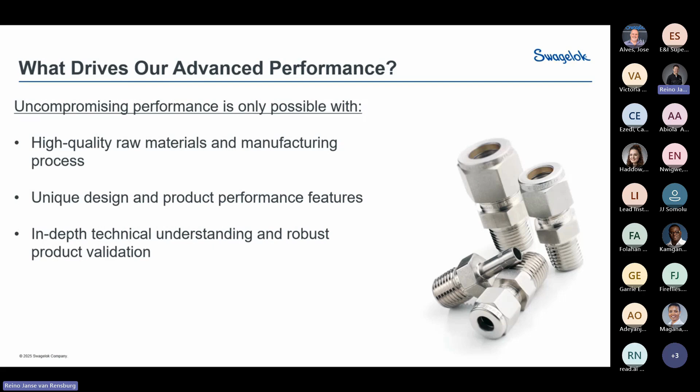Okay, so the three factors that we take into account when we talk about tube fittings: first off is tube grip, secondly is the gas seal, and then lastly is your vibration protection. So we'll look at them in that order, and I'll explain them as we go along.

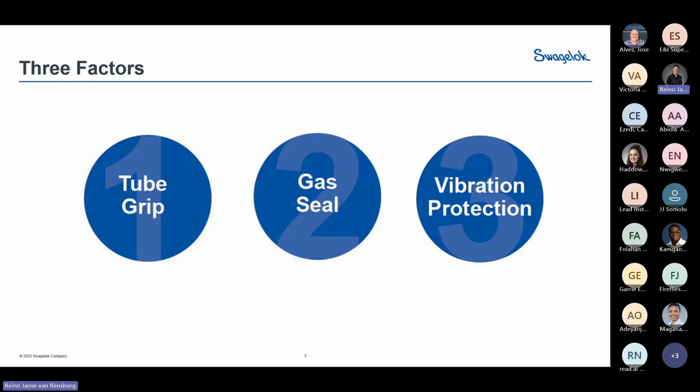Okay, so firstly, if we look at tube grip, with our tube fitting, our back ferrule does all of the tube gripping. So if you look at the picture on the right-hand side, you will see the blue ferrule on the left. So that's our back ferrule. It uses a hinging and colleting action, and that provides more direct tube contact and tube gripping support. So other than original or previous generations of tube fittings, where you basically make contact with your back ferrule by biting into the wall, this back ferrule now hinges in the center.

So if you guys can see my mouse, in the center of this back ferrule, you basically have a compression and a hinging action taking place, making our back ferrule grip onto the tube and holding onto it. So this gives us our tube grip as well as our vibration resistance. Because of our design, we have more material to work with. So this gives us direct axial support, and then also it's a colleting squeeze.

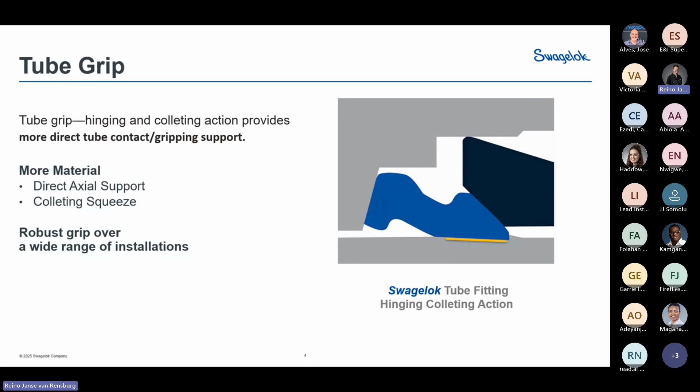So much more of the material actually grips and holds onto the tube than the traditional ferrules, where it was a bow and biting action, and your front ferrule would almost penetrate the side of your tube wall in some instances. Okay, so here you can see the tube grip basically contains the system fluid, and you want it without leakage at your maximum working pressure to maintain both the grip and the seal.

So here you can see with a single ferrule bite-type fitting, the picture on the left-hand side, the only contact you make with your tube is where that leading edge of your front ferrule basically bites into the side of your tube, and then where it makes contact with the inside of the fitting body, the top part over here where my mouse is. So one ferrule has to do the tube grip as well as the sealing.

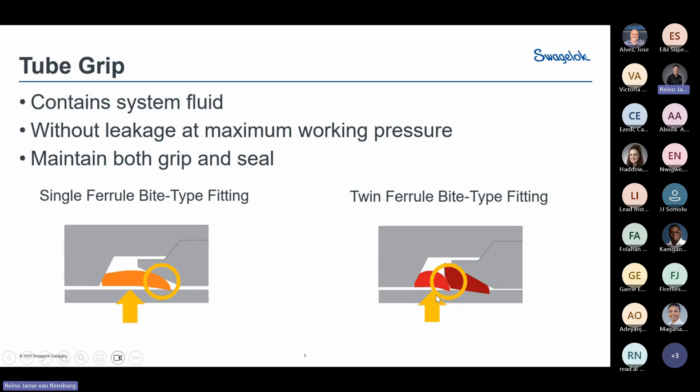Okay, if you look at the one on the right-hand side, this was a later design. This is basically where you have twin ferrules, but you still have your back ferrule penetrating the wall, and then you rely on your front ferrule biting into the tube as well, giving you the seal. So this is a little better, but you still have that high stress zone that gets applied to the side of your tube wall.

Okay, so if we look at our Swagelok tube fitting, like I mentioned to you earlier, we use the hinging colleting tube grip fitting. So we don't have that biting action into the tube wall, not with our front or back ferrule. So we don't put any additional stresses onto the tube or onto our fitting.

So all of the stresses get handled by our back ferrule, which basically hinges where that yellow arrow is pointing, and then ends up gripping the tube, pushing our front ferrule forward, which also grips onto the tube to form a seal onto your tube as well as seal into the inside of that fitting body.

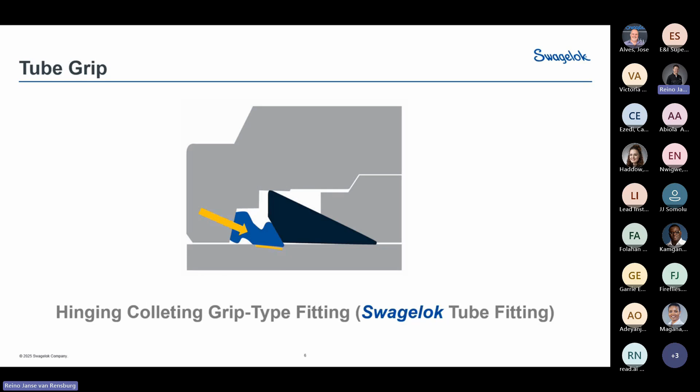Okay, so like I said, our gas seal takes place on the front ferrule. So what actually happens is when you tighten up your tube fitting, at the end of the presentation you will see a step-by-step guide on how to install a Swagelok tube fitting. But as you tighten up that tube fitting to the correct amount of turn, you actually have a burnishing or a polishing action of the front ferrule that creates a concentrated zone of contact on the tube and on the inside of that fitting bevel to give you a much stronger seal.

So that's why it's important that you have proper tube grip from your back ferrule to make sure it doesn't let go and your front ferrule doesn't let go of the tube. If you look at those yellow lines, that's where it forms your gas seal to make sure you don't have any system leakage.

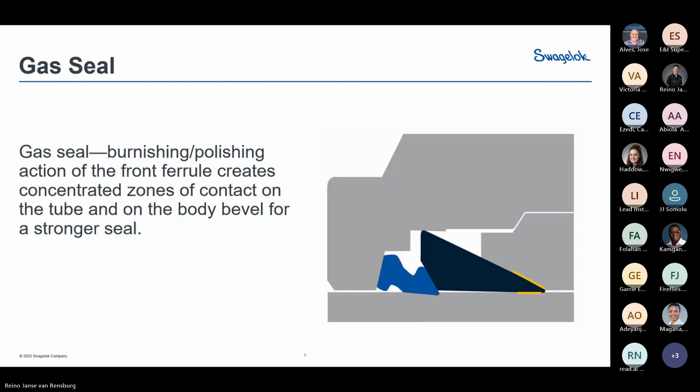Okay, so like I mentioned in the beginning, it's important that you use a very high quality material in your tube fitting manufacturing process. So with Swagelok, we spec a higher alloy content than required by ASTM A479. For stainless steel, if you look at the picture on the right-hand side, to conform to 316 stainless steel you have to have a minimum nickel content of 10%, ranging up to 14%, and you have to have chrome from 16 to 18%.

So you will see at Swagelok, we spec our nickel to be at 12%, and we spec our chrome to be at 17%, so much higher than the requirements of ASTM for 316 stainless steel. Now, the reason for this is not only does it give the fitting a better material makeup, but it also assures corrosion resistance against hydrogen. So you don't get hydrogen embrittlement or stress corrosion cracking, and it also protects that fitting against sulfides found in the offshore environment. So all of this gives you a much higher integrity of the material, so you're guaranteed of a good seal as well as a great product.

Okay, so what creates a leak tight fitting? Sorry, Reino, before you continue, there is a hand up. Yeah, good morning. Good morning. First of all, thanks to the Swagelok team for arranging this seminar for the team. It is a very good topic.

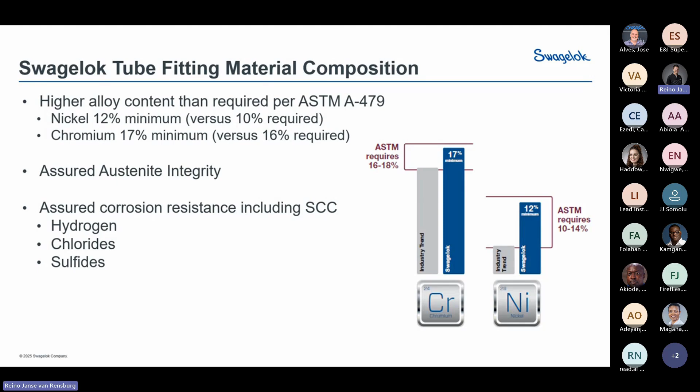Okay, so what creates a leak-tight fitting? So like I showed you before, the Swagelok tube fitting has a unique back ferrule, which is called the hinging colleting action. Because, as I told you earlier, we use a lot more material in our back ferrule because we don't rely on that back ferrule to basically make a bow and then bite into the tube with that leading edge of the front ferrule. So with more material, we get more direct axial support. We get that colleting squeeze, like I told you.

Later on, I'll show you what a vibration test looks like. Our fitting protects the front leading edge of our back ferrule, and the crack always happens somewhere after our back ferrule. So our ferrules don't have an effect on the integrity of your tube.

Okay, and then the way the ferrule works, it also gives you a lot lower pull-up torque. So if you look at the original and more traditional fittings, they require quite a high torque value to tighten them up. Whereas with our fittings, in some instances, it's 2 to 3 times less torque to tighten the same size fitting with the same amount of turns.

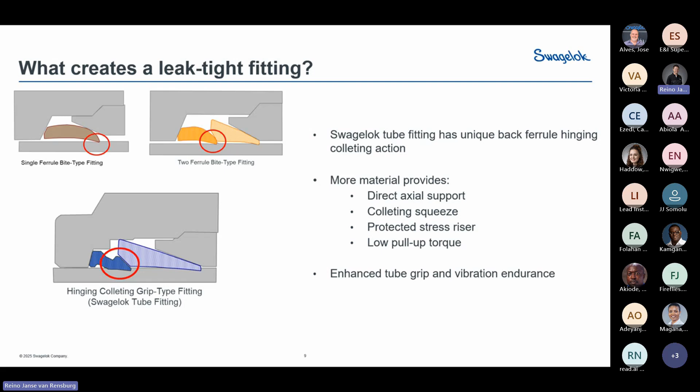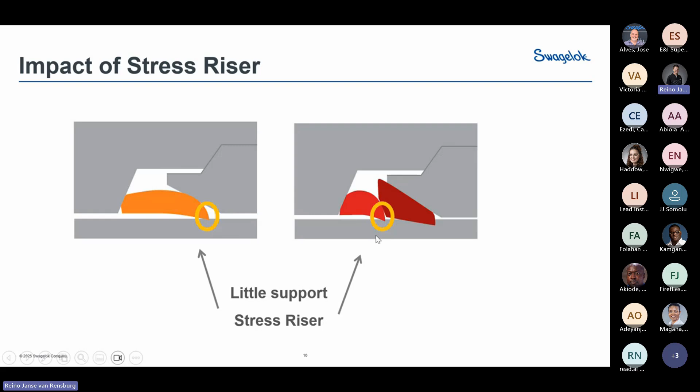Okay, so here you can just see that stress riser again. So if you do, like I said, the vibration test, they generally break right where those two tips of those ferrules, the one on the yellow and the one on the red, both in the yellow circles, they will generally break right on that weakness point where you bite into that tube.

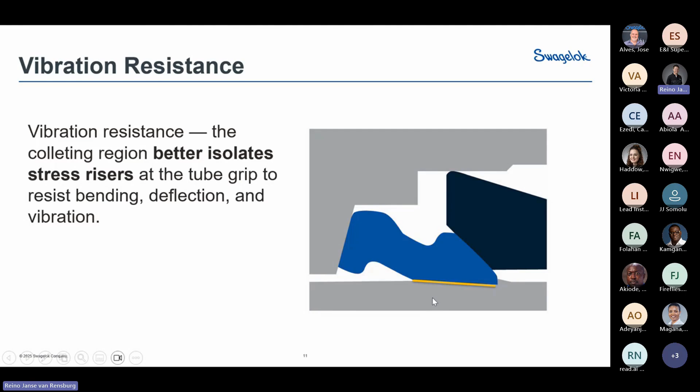Okay, so vibration resistance: the colleting region better isolates the stress riser at the tube grip to resist bending, deflection, and vibration. Because we have a much greater area of grip onto the tube, you will see now in the video that's coming up, we do a vibration holding test. So here you can see we used a half-inch tube with 0.035 wall thickness stainless steel.

The alternating stress that we're going to put onto it is basically equivalent to 1,140 bar. Working pressure will be 180 bar, so the system will be under a constant 180 bar. The offset that you'll see in the video now, the rotor spins at 3,500 revolutions per minute, and the criteria for passage is greater than 10 million cycles. So basically, let me just get the video to start.

So here you can see what the deflection looks like when the rotor spins. So it causes a set offset. You can see as we start off, so this whole system will be under 180 bar, which is the working pressure. And there you can see the vibration that's caused. You'll also see on the right-hand side now how fast it actually is when it's at full speed.

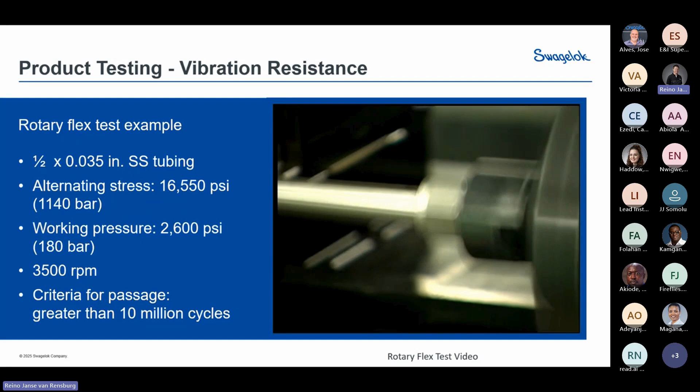So it's quite a hectic vibration that gets put onto this tube to simulate similar vibrations that we will see in plants from pumps and compressors and all sorts of rotating equipment that's constantly moving on sites. So for us to complete one of these tests, like I said, it's a 10 million cycle spin. There should be no leaks and no cracks. And it takes about 3 days to complete a test like that.

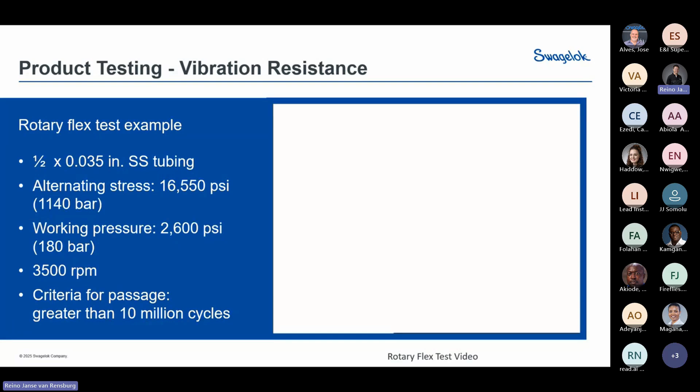So this is basically what the test report tells you. So it gives you all the offsets, how to do the test, where your vibration range is, the number of cycles, and how you pass it. So the rotary flexure results have to conform to ASME B31J, like you can see on the top here. Okay, so with this full test report, you can see all the tubes that were tested, if they passed or not.

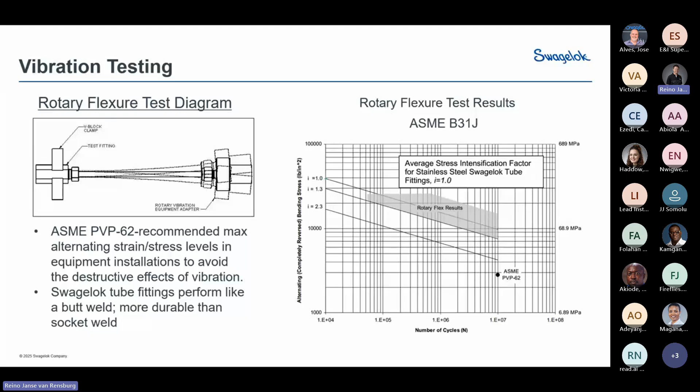Okay, so we have a patent on our back ferrule. So you can see it's important to choose consistency of your product. So you want the expert design, proper metallurgy, and also the performance testing to make sure when you put that fitting into your system or your plant or wherever you're going to use it on an offshore rig, you want to be sure that when you pull that fitting up, and you'll see how simple it is a bit later, you're going to get 100% seal of whatever media is running through that system.

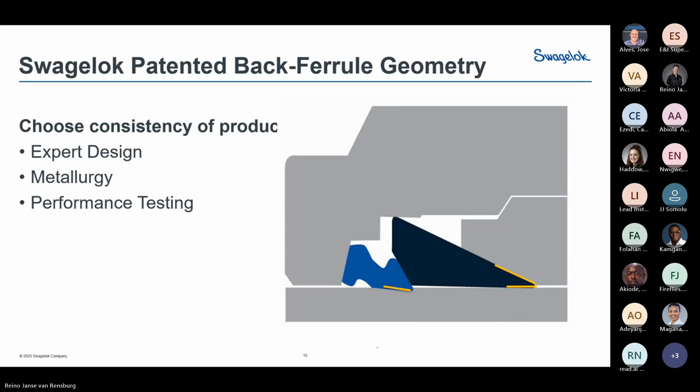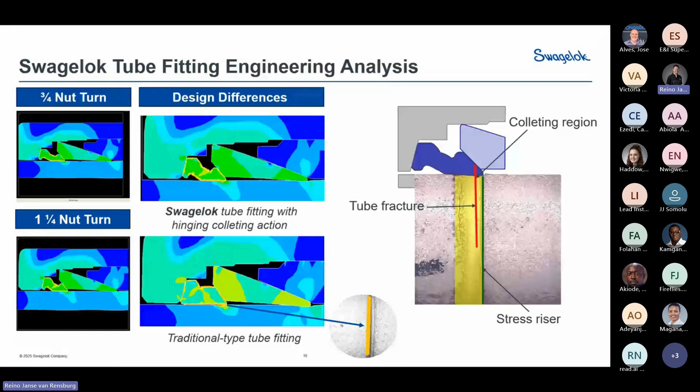Okay, so like I mentioned in the beginning, there's a really easy way how to pull up a Swagelok tube fitting. So it's really size dependent, but we'll talk about the most common one because most people use fittings starting from 1/4 inch all the way to 2 inch or from 6 mil all the way to 50 mil. Use one standard pull-up instruction, and then we'll talk about the smaller size fittings in a lab; when you use smaller sizes, there's a slightly different procedure.

Okay, so if we look at step 1, it says insert the tubing into the tube fitting. So an important thing to do when you insert it is you can either use a depth marking tool.

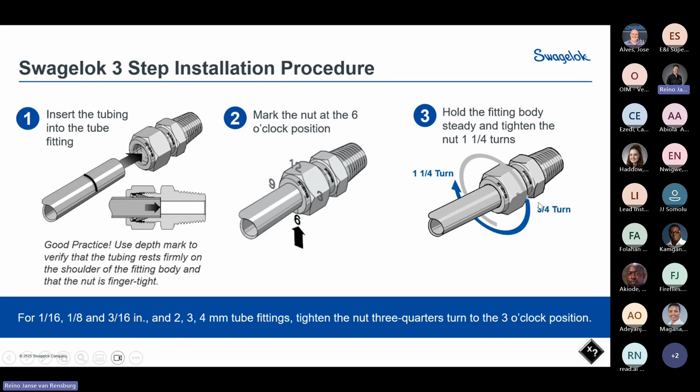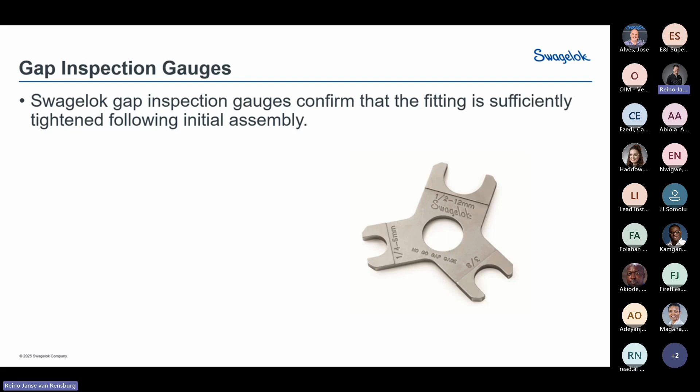Now with our fittings, they are actually gaugeable fittings. So what do we mean by our fitting is gaugeable? So with our fitting, once you've done that pull-up, and you've rotated the nuts from 6 o'clock to the 9 o'clock position or to the 3 o'clock position, if you have one of these gap gauges, you can actually check that fitting and inspect it to be certain that it's been tightened up sufficiently. Okay. So with these gauges, when you install them into a fitting, if you've done the correct amount of turns, that gauge will not fit into the gap between the nut and your fitting body.

If you under tightened it for some reason, let's say you didn't make a mark, or you had people, contractors, for instance, install the fittings and you want to double check whether it was done correctly, you can literally just take your gauge and go check each and every nut. So if your gauge still fits in between the nut and the fitting body, like you can see at the picture on the right-hand side, that fitting needs to be tightened up a little bit more to make sure you get to a point that it looks like the fitting on the left-hand side where the gauge does not fit into that gap.

Okay, so like I said, our fitting is gaugeable. So for any size of tube fitting we sell, you can find the gauge to double check that it's been pulled up correctly, and you know that it's going to be leak tight and your vibration holding seal will be met.

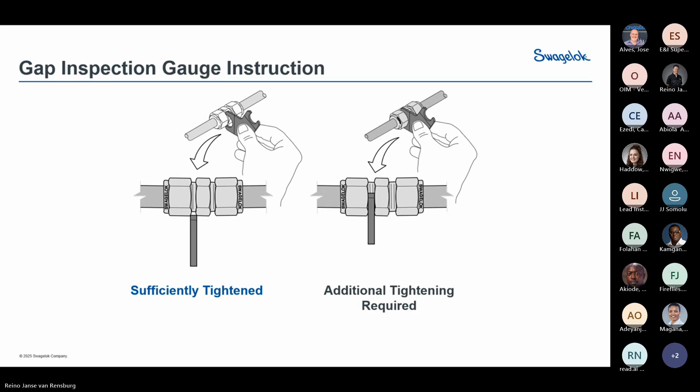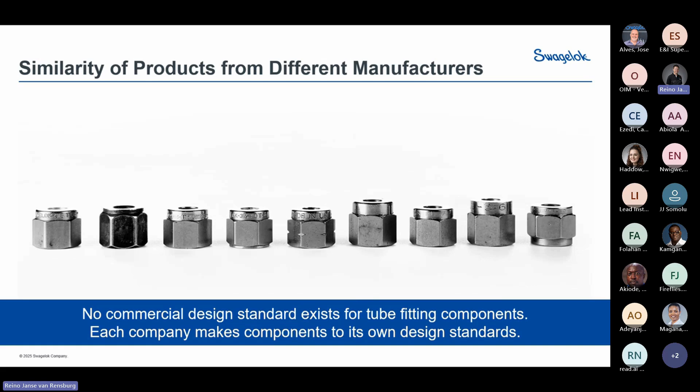So they might look very much the same, but it's important to make sure and verify when you install a tube fitting that all the parts belong to the same manufacturer. So I'm going to play you a short video that explains why it's important not to mix tube fittings. So that's why it's better to have one standard on your site, so your technicians or your artisans that install these fittings don't get confused by using different brands and mixing them up.